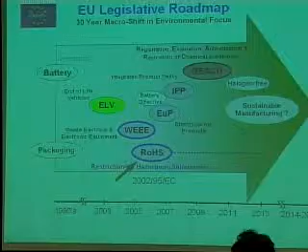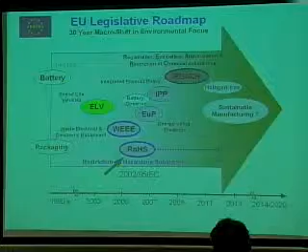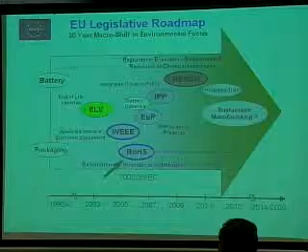We're not going to talk about these. The one I want to talk about is the regulatory activity in the European Union. They've been very effective, they've been very proactive in Europe in regulating hazardous substances. And the program I really want to emphasize here is this ROHS program, Restriction on Hazardous Substances. We sometimes just call it ROHS for short, because they get tired of saying Restriction on Hazardous Substances, quite frankly.

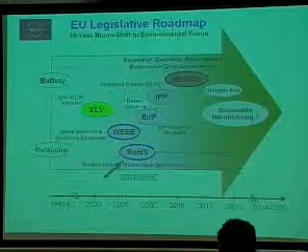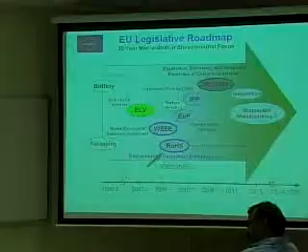But to put this in context, back in the 1990s, the European Union decided, well, it needed to regulate batteries, because if you've ever had a lead-acid battery tip over in your car trunk when you were trying to transport it and acid spilled out, you know there's a hazard here, and there's a lot of lead in batteries. So they got involved in regulation of batteries, packaging materials, and then after 2000, they became very active in things such as end of life of vehicles, regulating substances that go into vehicles and the recycling of those substances. There was an initiative called the Waste Electrical and Electronic Equipment, the WEEE Initiative, and that's very nicely coupled with the Restriction on Hazardous Substance Directive.

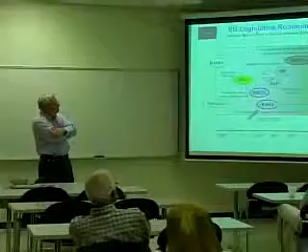This is a recycling initiative. This one attempts to address the manufacturing and the substances that go into these.

There are a lot of other programs, such as a new battery directive in Europe that's more effective than the old ones—they've learned a lot. There's a program called the Integrated Product Policy, Energy Using Products. There's a new one called REACH, Registration, Evaluation, Authorization, and Restriction of Chemical Substances, which is just being dealt with now. And there's talk about halogen-free, for example in PC boards, sustainable manufacturing, and things like that.

It turns out that this Directive 2002-95-EC, or the ROHS initiative, actually became effective in 2006 for a number of products, such as cell phones, laptops, all sorts of consumer electronics was impacted by this ROHS program. And that's the one we really want to focus on, because that's really the largest driver of what changes are going on in electronics.

For the ELV, that's end-of-life vehicles—this is basically just the vehicles which are scrapped and so forth, and then what's it?

Well, there were restrictions on some materials, such as lead and cadmium, for example, but it also deals with the recycling of these materials.

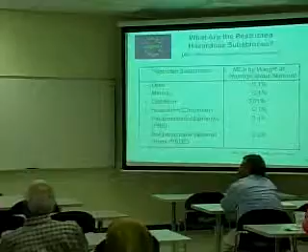And then there are these polybrominated biphenyls and diphenyl ethers. These are flame retardants, used in things like the coating on cables, wire used for wiring electronics. They have been used in the past as a flame retardant in clothing, especially children's clothing, and have been deemed not allowable, so those have been restricted.

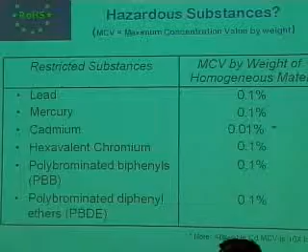So those are the 6 substances we're talking about. Now, quite frankly, the last 2 have been pretty well removed—we're not going to be concerned about these for the remainder of the talk. We're going to focus on the others, and lead is primarily the really important one.

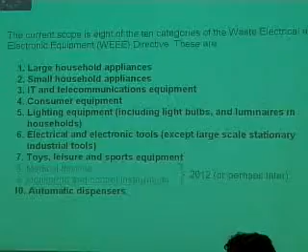Why is lithium not in that list? Any reason? Well, it's so highly reactive. Keep in mind, go back to the original question I asked when I talked about regulation in general: how do you determine what you're going to regulate? If you sit down and list everything that's a candidate, it's huge.

Only a few of these are going to make it and have a chance of really being implemented in a reasonable amount of time. There will be a ROHS 2 and probably a ROHS 3, and things will be added to this. But these were the ones that made the first cut. So there's more to come.

So ROHS, these 6 substances pertain to the following items: household appliances, information technology and telecommunications equipment, consumer equipment and consumer appliances, lighting equipment, electrical and electronic tools, automatic dispensers, toys, and sporting equipment. There are 2 categories that were not made active in 2006, and those are still under consideration for perhaps becoming active under the 2002-95 EC directive starting in 2012 or later.

That's still being debated right now. Medical devices, monitoring and control instruments, which is what Agilent's concerned about. We make monitoring and control equipment. So that's where we come in. We're presently trying to bring our instrumentation under ROHS compliance a year before this date.

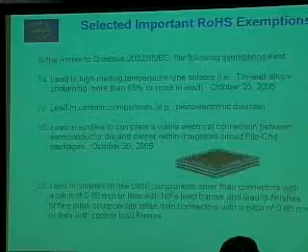For example, one of the exemptions is that in flip chip on an integrated circuit, you put solder balls on it, turn it over, flip it, and attach it to the package. It turns out you want a higher temperature solder to do the solder balls on the flip chip, so they have made an exemption. They allow high lead solders to be used. In fact, 90% lead, 10% tin, and 93-7 is also used for flip chip, so there's an exemption.

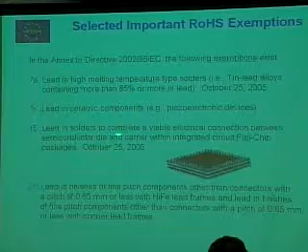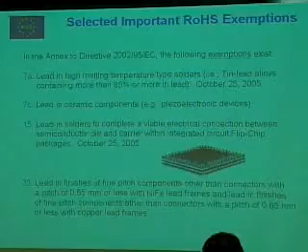Another one is lead in solders to do a viable interconnect. Here's an example of a flip chip on a package. You see the solder balls of a BGA around that, but the chip itself is actually put down upside down with solder balls with high lead. So there are exemptions that have been allowed, and there are actually 29 exemptions right now that are active.

I'll just say one thing about the WEEE Initiative. What I think is interesting about WEEE is these are the targets for materials in the European Union. They wanted to recover a minimum of 80% of materials under the WEEE Initiative, anything that falls under WEEE, largely through reuse or recycling. Only 5% was supposed to be allowed for incineration, and disposal maximum 20%. It's kind of hard to get numbers, but they haven't hit these numbers yet. They're probably about 70-80% of the way to meeting these numbers. So it's difficult, even in Europe where they're very conscious about recycling.

Okay, so now let's talk a little bit about the substances themselves: lead, mercury, cadmium, and chrome. And that's the periodic table, as you will recognize.

And lead is really the bad actor. That's the one causing most of the issues in the conversion. I always wondered where PB came from. It's plumbum, from the Latin. I'd always felt we should have kept that name, I kind of liked it - plumbing, yeah exactly. One interesting thing about lead is that lead poisoning was actually documented in ancient Rome, Greece, and China. This is not a new phenomenon, it's been around a long time.

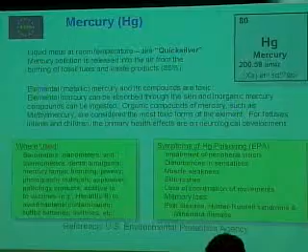Mercury. Well, again, we all know a little bit about mercury. We've probably all noted it's a really neat liquid metal at room temperature, but it has a lot of problems from mercury poisoning. Again, it's a heavy metal ion and it can cause problems. It's used in a lot of places: thermometers, barometers, jewelry. I thought this one was kind of interesting - it's an additive to vaccines, such as the vaccine for hepatitis B.

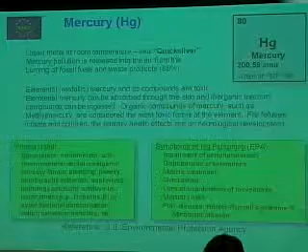To avoid bacterial contamination. Button batteries - how many have we seen those? I actually brought a couple of button batteries with me. Switches, mercury switches, those kinds of things. So it's pretty prevalent.

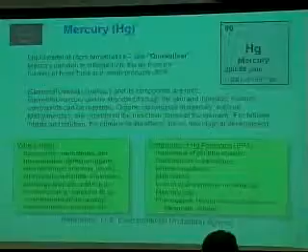Chrome 6. Okay, this one is fairly famous because most of you have heard the name Erin Brockovich, and this little town, Hinkley, in California. So the Chrome 6 level in the groundwater of Hinkley was 6 times higher than what the EPA actually considers to be safe. And again, you see it's actually used in a lot of places.

But the main one we're concerned about is these conversion coatings on mechanical parts that we put into our instruments. And even my understanding, Mike, is on conversion coatings, even though you've gone through the process, you still have some of the Chrome 6 atoms or ions around in the chrome conversion coating. And those, under moisture and humidity, can actually leach out. So that's where your source of Chrome 6 actually comes from when you've done a conversion coating on these materials.

So is that the same material used for tools? The ones they mention have chrome as a non-rusting factor? Yeah, I know what you're talking about, I'm not absolutely sure, I'd have to check on that. That chromium is in a valence 0 state, so that's chrome 0. So then it's okay, not toxic? It's okay, yeah, and the valence 3 state also, which is the preferred method to do this now.

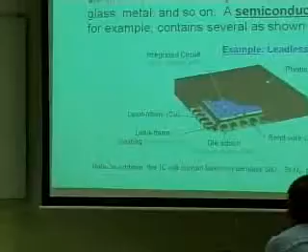You can see wire bonds from the chip. The chip might be silicon, for example. And then, of course, you have this molding compound.

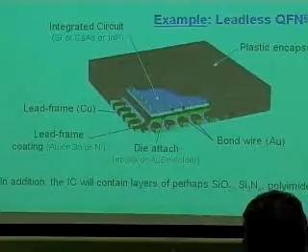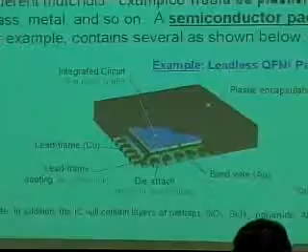So each one of these specific materials must meet the criteria for those concentration levels for the six substances. That's the way ROHS is defined. There have been people that have said, well, maybe if you just take the component, grind it up, and if the whole thing together is less than 1,000 parts per million for all of these, that's okay. Well, no, that's not what the ROHS directive says. It says it must be for each specific homogeneous layer or region of that material. That actually has been confusing for some people, so I wanted to define that.

So how might you detect the presence of such substances? A very simple way to make a first attempt at identification would be one of these handheld X-ray analyzers. This is X-ray fluorescence, and these are actually pretty neat. Here's a little gun. It generates X-rays and looks at the radiation coming back, the fluorescence of the atoms in the material, and it's able to identify these by energies or wavelength, and then a computer attached to this will do the analysis. Now, it's not highly accurate, but it gives you a pretty good indicator if a substance is present. And we have evidence that it actually works.

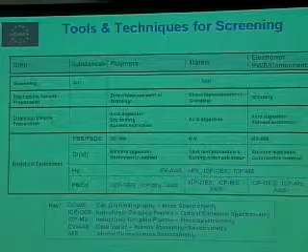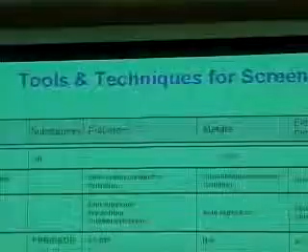Now, if you need to know it a little more accurately, then you get involved in some much more comprehensive analytical tools. For example, with these polybrominated materials, gas chromatography coupled with mass spectrometry is a tool that works quite well for that. They're basically hydrocarbons with bromine added to them, so gas chromatography is quite effective there. If you're looking for mercury or lead or cadmium, then using various combinations of atomic absorption or emission spectroscopy, mass spectrometry using something like inductively coupled plasma or glow discharge, or other ways such as laser ablation, what you're trying to do is create ions, individual ions from the material. And obviously, if you're taking a material and tearing out atoms and ionizing them and running them down a mass spec to analyze it, you have to have calibration standards to go along with that. So it takes a fair amount of effort and calibration to come up with fairly accurate determinations of these, but there are analytical tools to do this.

But these are destructive means, I suppose, right? Yeah, so that could be another talk into itself, quite frankly, because there are a lot of very interesting aspects to this.

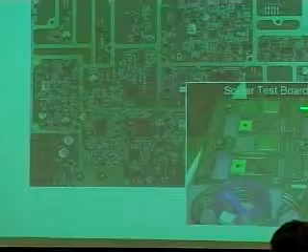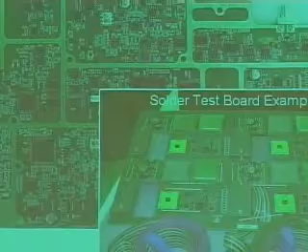Okay, now let's talk a little bit about how lead-free solders impact electronics. This is where the elimination of lead becomes very prevalent and has caused a lot of work to be done. Incidentally, this is kind of a typical RF board, a printed circuit board with a number of components. This is a board that someone put together just to do solder testing with lead-free solders, so they have a number of test packages on here. They've replicated it, and this board can then be put into a temperature chamber and temperature cycled, or it can be vibrated, can be exposed to shock. There are a lot of things you can do with it.

Okay, so before we get into some of the details, let's talk about the life cycle of solder. When you go to solder a component on one of these boards—and I'll pass this board around—this is pretty representative of a large number of components, different types of components. Incidentally, the plastic connectors are put on after the reflow process; those are hand-mounted. But the semiconductor parts and the small chip components, resistors and capacitors, go through the reflow. So what happens is you raise the temperature on a board with components on it, with solder paste having been applied to the board, then you put the component where the solder paste is.

Once you get up to the temperature where the solder begins to melt and becomes a liquid, this is when things really start to happen. So for example, on the board you may have copper traces, you may have nickel-plated traces, you may have electroless nickel with a flash of gold on it to reduce the oxidation of the nickel. A lot of different things can be put on that board, but the main point is that when that solder melts, materials such as copper and nickel and gold start to dissolve into the solder.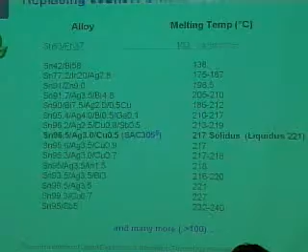There are other variants of the SAC solders where you might have 4% silver, or you might have 1% silver. And the amount of silver that you put in there can affect the intermetallic growth, and it may, for example, by reducing silver, you may actually get an improvement in the shock tolerance in these solders.

So, okay, so I've just kind of summarized what I've said here. There were a lot of nice things about lead-tin. It would melt at a lower temperature. It was a fairly ductile joint, so shock and vibration was very robust.

Tin whiskers. How many of you have heard of tin whiskers?

Okay, tin whiskers I think are one of the neat things. It turns out the lead in lead-tin solder greatly inhibited tin whisker growth—didn't completely eliminate it, but really held it back. At the end of this talk, we'll discuss tin whiskers a bit more. The lead suppressed the copper-tin reaction, that intermetallic formation, and we have 60-plus years of experience with it.

So now let's talk about SAC 305. Some of the consequences are that the reflow temperature, when you take that PC board and reflow it with components attached by solder paste for surface mount, you go to higher temperatures. Some boards, like FR4, didn't take 260C very well, so new laminate materials have had to be introduced—probably not a bad thing. The other components, now stressed at a higher temperature, have to be able to withstand that higher temperature over a few minutes without degrading or failing.

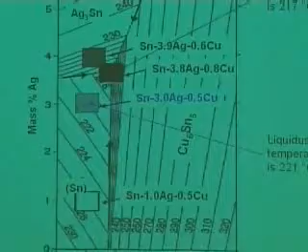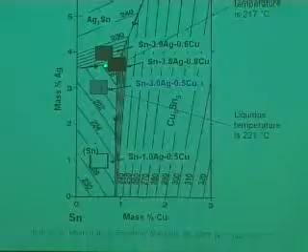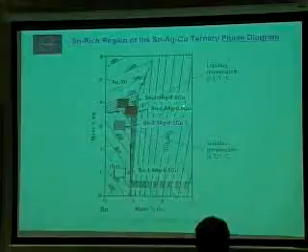So this is the corner of the phase diagram where this point is 100% tin. This is the percent of copper in the SAC alloy, and this is the percent by weight of silver. For SAC 305, we have 3% silver and about 0.5% copper, so this is where that appears on the phase diagram. Now, what this would really like to be is at the intersection of all these lines, about SAC 3.8 or 388, actually, the way we'd read that off—so a little higher in silver, a little higher in copper. At that point, at 217C, that's the liquidus temperature.

The SAC 305 actually has to be heated a little higher because it's a slightly different composition—you have to heat it to a higher temperature for it to actually turn to a liquid. But once it turns to a liquid, it can start to have dissolution and actually head toward that other point. My point with this slide is there are two things. One is, for example, SAC 105 is one of the solders people are using for more robustness in vibration. With this one, you can see you have to heat to a fairly high temperature, probably about 226, before it becomes a liquid.

If you make a SAC alloy solder that's way off on either side of this tin-rich segment, you can actually have to increase the temperature to turn it into a liquid by quite a bit. The other part of this is when you buy a SAC 305, it isn't necessarily exactly 3% and 0.5%—it's probably close to that, but there's some manufacturing variability. So you have to build tolerance into your process. You can't just believe these numbers straight away.

Okay, I did want to say a little bit about tin, because you'll note in the SAC solders, tin is dominant—it's 95, 96, toward 97% tin. So we really have a tin-rich material. Tin plays a big role in the intermetallic formation and the behavior of this material. Tin is obviously a nice choice because it has a low melting temperature—tin itself melts at 232C. It's widely available, low cost, and environmentally benign.

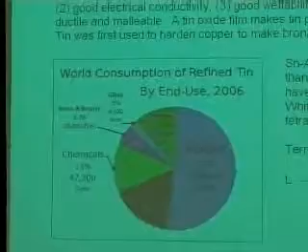That's really the main thing here. It actually is a pretty good electrical conductor and has good wettability. One of the things I thought was interesting is tin was actually first used to harden copper to make bronze, around 3500 BC. That's a long time ago—this is not a new material. Copper isn't a new material either.

Okay, and you can see in terms of world consumption of tin, as of 2006, the estimate was that solder consumes about half of it. That's a lot of solder—188,000 tons.

When you turn this material into a liquid and start to cool it, you can get intermetallic formations such as silver-3-tin or copper-6-tin-5. This is where copper would start to play a role. If it's on a copper pad, you'll get even more copper, so now you have competition for these intermetallics being formed. The beta tin is the pure tin. When solder cools, it isn't homogeneous. You get regions of intermetallics, and regions of various compositions and materials. So depending upon what you dissolve in this solder joint while it's liquid, you can have a very interesting effect on its behavior, such as wetting.

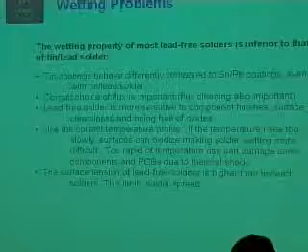Tin coatings behave differently than the old lead-tin coatings. For example, people used to solder dip leads on components, so finishes on leads are very important. Choice of flux can also be very important here. Component finishes, as I said, are very important. Surface cleanliness, free of oxides, etc. Use the correct temperature profile, otherwise you can run into trouble.

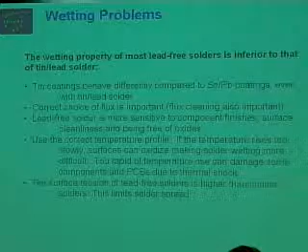Is wetting about the lead or the solder? If I have a pad and I want solder to cover this entire pad, and there's a component adjacent to it, then what I want is for the solder to cover all of that pad. Now if the pad isn't clean, it may retard wetting. But I want the intermetallics to start forming over this entire pad as I cool it. And sometimes with lead-free, you don't get that.

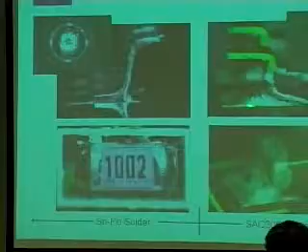Here are some examples of what you would see. On the left-hand side, this is lead-tin solder. Here's a cross-section of an IC package with the lead coming down, and you can see that looks like a pretty good solder joint, doesn't it? If you look at the equivalent joint with SAC 305 solder, it doesn't look quite as shiny and smooth.

Here's just a solder ball, nothing attached to it except it's sitting on a pad. Lead-tin gives you a smoother surface. This is actually pretty good, but some of them look actually worse than this. The SAC solder looks rougher, and you actually get microcavities on the surface of these balls as they cool.

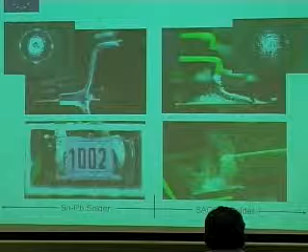Here's a small component on a surface mount board, lead-tin. The lighting's a little different here, so don't look at the yellow color, but you can see the quality of the surface finish, how shiny it is relative to the lead-tin. That's the kind of thing you typically see optically. How about the conductivity of these things? These are actually very good solder joints—the resistance is quite good.

Reflow profile: when you run a board with components on it into a reflow furnace, you have a period where you preheat it, bringing it up and leaving it in for a certain amount of time because you've got a lot of thermal mass on that board. Not all of the board heats up at the same temperature at the same time. So you can see that once you've preheated the board and the components, you actually reach the solder melting point, which for SAC 305 is 221, as shown on that phase diagram before.

Then there's a short period where you take it up to a peak temperature, typically around 260. It's typically like 225 or 230 for lead-tin solder, so you can see it's about 30 to 35 degrees hotter than with lead-tin solder. Then, of course, you cool it down fairly rapidly. It's very important that you don't leave it at this higher temperature for too long, or you'll get too much intermetallic formation, leading to a degraded or weakened joint.

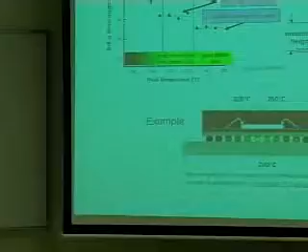Let me give you an example of where this turns out to be really interesting. This is a BGA, a substrate. Solder balls attach this package to the PC board itself. There's an integrated circuit inside, and there's actually a lot of thermal mass with this package. In fact, some of the packages are very large, with a lot of thermal mass. It takes a while to bring those up to temperature.

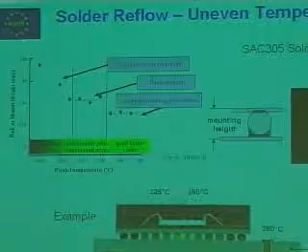In fact, this is an experiment published last year where they embedded thermocouples in various parts of the package: at the chip, the solder ball in the center, the solder ball at the corner or edge, and at a trace a little further removed. This was run into a reflow furnace set at 260, and away from the package they did see 260. At the edge of the package it was 255, pretty close to 260, so everything's okay. But near the center of the package, it only got up to 235.

So these solder balls are not all going to be the same when they go through cool down, in terms of the cross-section of the intermetallic growth. And also, they're going to freeze, that is solidify, at different times. They're not all going to do it uniformly.

Hence, you can see that as you lower this temperature, if it reflowed at around a little over 230 to 250, you got a pretty good solder joint. If this temperature is below that, or too short a time, you actually get degradation in the solder balls.

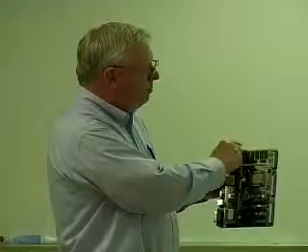Now, where this has really caused problems is if you have a board, and let's say in this part of the board we had a bunch of BGAs where there's a lot of thermal mass, and down here we didn't. This part of the board will not get anywhere near as hot as it should. There's a mismatch in thermal masses, and therefore when this reflows through the furnace, if you're not careful, you will not get good solder attached with the BGAs.

Now, there have been companies, and I will not name them, that have said, oh, we can fix this by raising the reflow temperature. Let's change it to 270 or 280. Well, there are probably components that cannot take that, and we've seen problems like that. So that's why it becomes very important to know something about the thermal masses on your board.

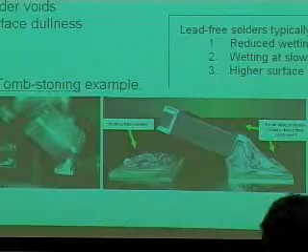If it doesn't get sufficiently hot, you'll get cold joints, and I think we all know what cold joints are in soldering. Not good. Voids, voiding can occur in solders, and that is not good either.

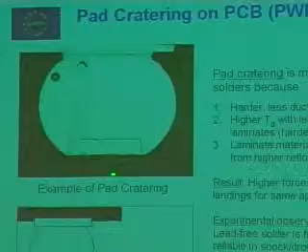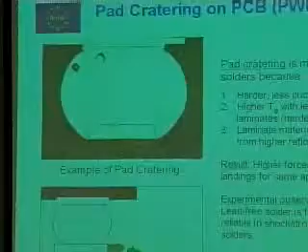Pad cratering is another failure mechanism. This is due to the fact that what you're looking at here is a PC board, this is the surface of it, and this is a solder ball up to a component. What you're actually seeing here in this cross-section is a fracture in the PC board. It's exaggerated here, but you can see what happens when pad cratering occurs at higher temperatures: you can get a separation, and potentially a break in the metal line that feeds the signal in or out to the solder ball. Pad cratering is another defect, and it becomes more and more prevalent as you go to higher temperatures in the reflow. So that's another example of a failure mechanism that is exacerbated by higher reflow temperatures.

Okay, so let's talk a little about these intermetallics. This is a very fascinating subject. One thing I'll point out is what we have here is a copper pad, and we have tin in the solder—remember, it's a tin-rich solder—and the intermetallics, in this case copper-tin intermetallics. What's interesting is all of these materials have different crystal structures, so there's no way you're going to get them to match up. In fact, what typically happens is that as you go into the melt you get a liquid in the solder, and copper starts to dissolve into the solder.

In this particular case, where the cross-section was taken, you can see there's a layer. It's a fairly random layer in terms of thickness of what's called the epsilon phase intermetallic of copper 3 tin. Then there's the copper 6 tin 5 intermetallic, and finally up here is the unreacted SAC solder. This was reflowed for quite a long time to make sure a lot of intermetallics were actually formed. These are some surface morphology SEM photos for both of these intermetallics, and you can see they're quite different in structure.

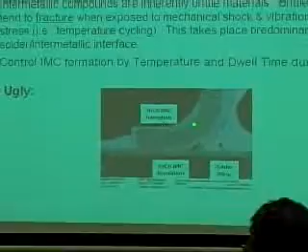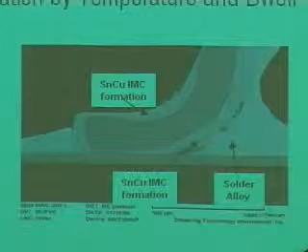Here's an example, a cross-section, where you can see the intermetallics. This is actually the lead itself on an integrated circuit, and the lead is bent, so it's a little thinner there. This is tin copper intermetallic formation along here. You can see there's a boundary, and some voiding that has occurred there. These intermetallics and the voids will weaken that solder joint. That's what we're concerned about.

So what people try to do is have some intermetallic formation. That's why I call this the good, the bad, and the ugly. You want some intermetallics, say typically tin on copper, to be around 1 to 2 microns thick. That gives good wetting and a reasonably good solder joint in terms of strength. If it's less than a micron, you probably get a relatively poor solder joint, poor wetting. The bad is that intermetallics are very brittle. If they become too thick or too prevalent, you'll have a weak joint. When you start stressing it, thermal cycling it, shocking it, you can actually get open circuits from that. And none of these look really neat, so they're all ugly, quite frankly. I guess the material science would say they look beautiful.

Okay, tin whiskers. I know we have about 5 minutes left, so this is just about on the mark for timing. Tin whiskers are interesting because it turns out you can get these very small fibers that grow out of tin. They're typically on the order of maybe 1 to 5 microns. They're pretty small.

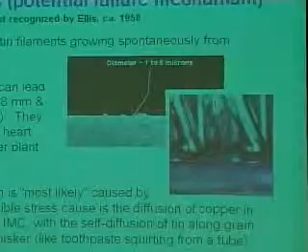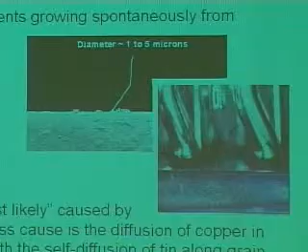Some of the longest ones ever recorded were around 18 millimeters, but that's very rare - that's a world record, probably. There is evidence that they have caused satellite, missile, heart pacemaker, and nuclear plant shutdowns. In other words, they can have consequences. They short - they can grow and short, or break off and rattle around in electronic apparatus. So the problem is shorting, and if you get something that's a few microns in diameter, they can carry some pretty appreciable current.

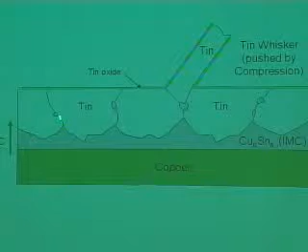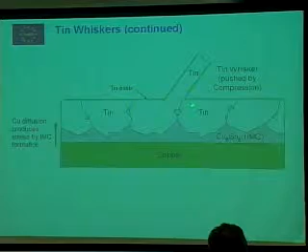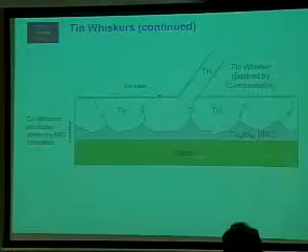There's been a lot of interesting discussion in the literature over the last 30, 40 years about the mechanism. I think this is still somewhat debatable, but the model I like is that we have a solder layer that is tin-rich, on copper, and as the copper dissolves into the tin, we're forming an intermetallic. At the grain boundaries, we get enhanced transport, and regions that go deeper into the tin with the intermetallic. These grains of tin are then being pushed on, compressed, or squeezed, and you'll have a tin whisker that squirts out like toothpaste coming out of a tube. Fairly simple model - it's actually being pushed by compression. That's the model I like. I know there are a lot of other models, and some objections to this also, but it's a fairly simple model, and it seems to be about as good as anything that's been published.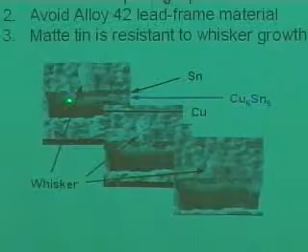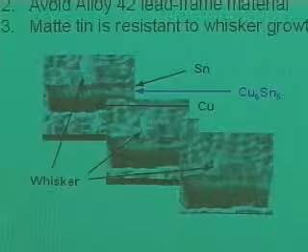How do you test for that? That's difficult. Here's some work that was published where they took cross sections - this is actually a whisker. They took cross sections just adjacent to it, and you can see where they've identified the intermetallic that's growing, in this case copper 6 tin 5, and you can see the sequence of growth here. As the intermetallic gets thicker, you can see the tin whiskers growing longer. That's one of the experiments cited for this particular model.

Can one reduce these things by temperature or something? Yeah, anything that would affect the rate of growth of the intermetallic are the variables you'd want to look at. One of the things that's confusing about tin whiskers is if you look through the literature, they've looked for things like humidity, temperature, all those things. If you line up all the papers, there's a lot of inconsistency, probably because not all the variables are being looked at.

What about conformal coating - would that help, at least in the short term? Well, that's one of the things that's actually been recommended to try and control that to some extent. Conformal coatings, the stuff you have on automobiles. In other words, put a lid on it.